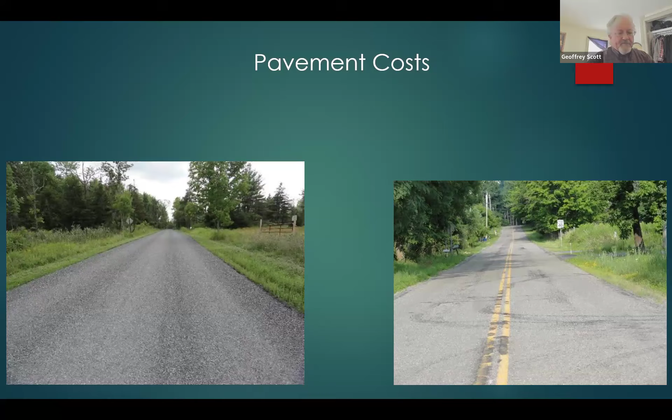So all too often maintenance is deferred on some of these roads, and over time, if you don't do the maintenance - particularly if you don't seal the cracks - moisture gets through those cracks, softens the base, the top surface of the pavement flexes, and it just shatters, causing potholes and loss of sections. So typically, once you start losing your road base, the repairs become astronomically expensive.

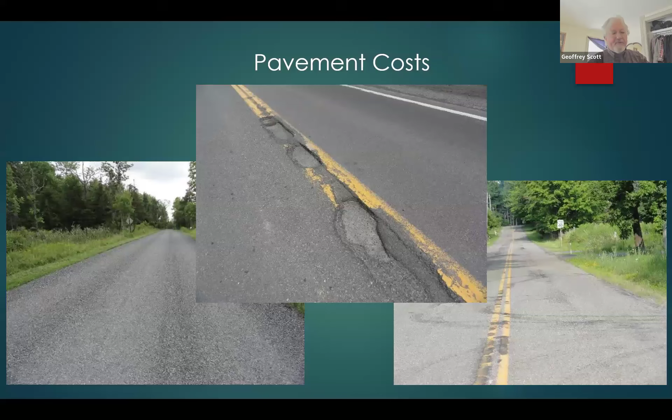So again, just being able to look at what you're doing, fixing repairs properly. In this center photo right here, they didn't use a tack coat, either that or it was dirty when they put it down. Simple practices that are going to give you the best bang for your buck long term is what you're looking for.

For pavement service life, for 75% of the time on most pavements, you'll see about a 40% drop in the condition. That time is going to vary. It can be 5 years, it could be 10 years, it could be 25 years. It really depends on how well that road has been designed and developed, and the changes in traffic, the weights of the traffic. But for the most part, 75% of that time, the pavement is typically in satisfactory condition.

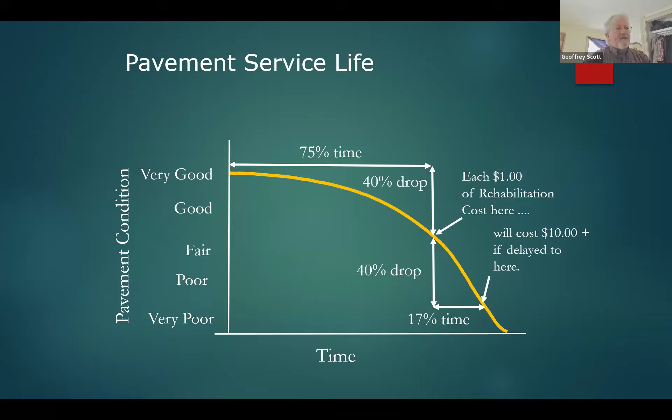But once those cracks start to become a little bit more prominent, you get that moisture in there. Once the moisture gets into that subbase, you're going to start seeing substantial drops in the condition and the life and the strength of that pavement. That's what we're trying to avoid if we can. If we can keep those roads in good shape, we're going to get a lot more bang for the buck and a lot more life out of those roads.

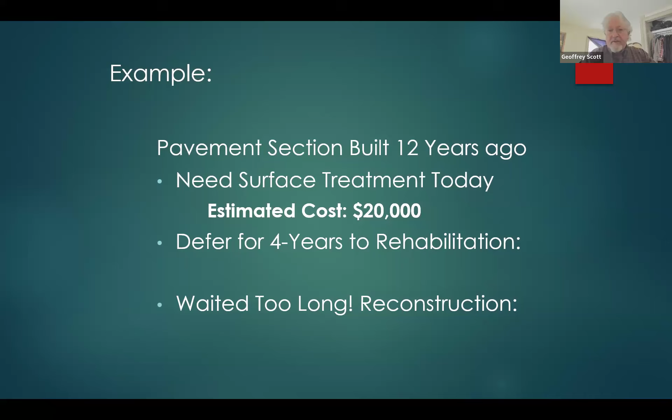For example here, the pavement section was built 12 years ago. Right now it needs a surface treatment, so that surface treatment is going to cost 20 grand, depending on the length and other types of things. But sealing that surface and putting a new surface texture on it, you're going to extend the life of that pavement. If you decide to put it off for a few more years and defer it for 4 years, then you're up to a rehabilitation. So now you've tripled, even quadrupled the value of what it's going to cost to bring that road up to a good condition. That's just putting it off, just deferring it - it's going to cost you long term. And if you wait too long, your estimated cost is going to skyrocket.

Reconstruction is where you'd really like to avoid if you can. The surface treatment, you can get a lot more roads done with just maintaining your roads in good condition. It's like painting your house or something - you're just putting a coat on it and protecting the wood.

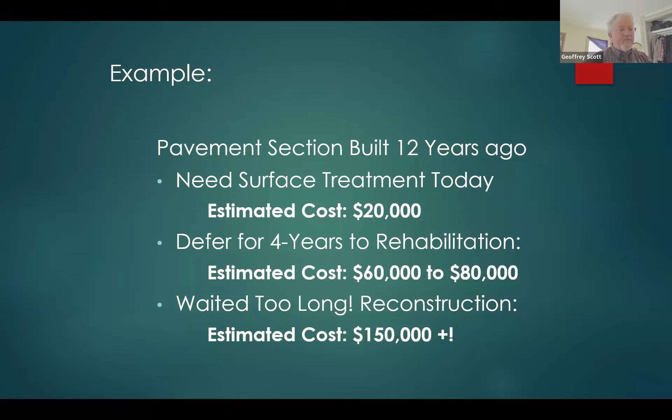Maintenance, or any kind of maintenance when it comes to equipment, is you can pay me now or you pay me later. It doesn't make sense to save pennies now and put off needed maintenance - deferring those repairs is going to cost you a fortune later on. So again, think about what you're doing, be conscious of what's going to happen. Time doesn't wait for anyone, and neither does the maintenance.

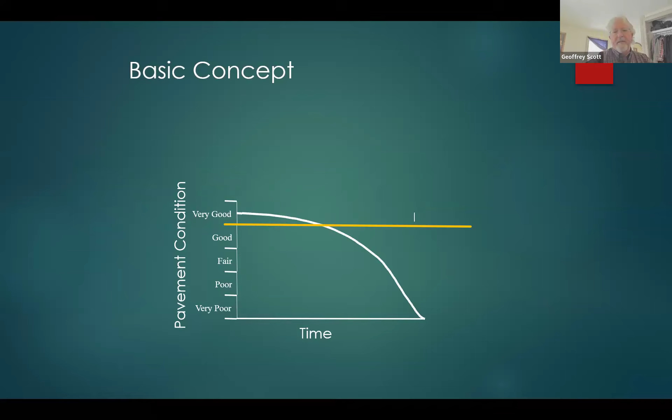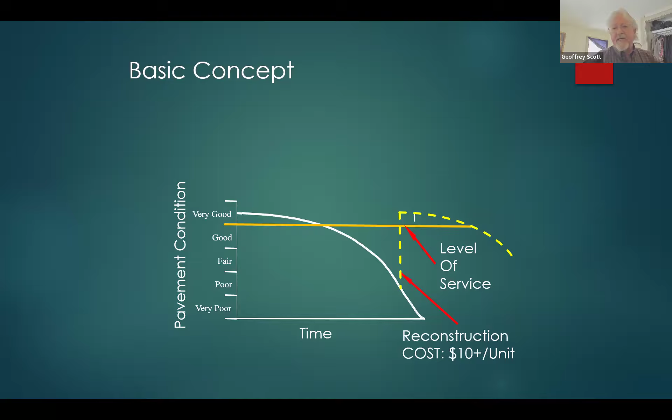The basic concept when it comes to pavement management, or any kind of management system within your network, is you set a condition that you want to try to maintain those roads at - a level of service, is what they refer to it as. Instead of letting those roads go to failure and getting charged $10 per unit, whatever that unit might be, if you can do your regular preventive maintenance over a long period of time, that $1 per unit is going to be a lot more cost effective. The roads are going to be in a lot better shape, and long term you're going to have good roads over the longer period of time. So the idea behind asset management is basically taking care, doing your regular maintenance, keeping those roads or those pieces of equipment in good shape.

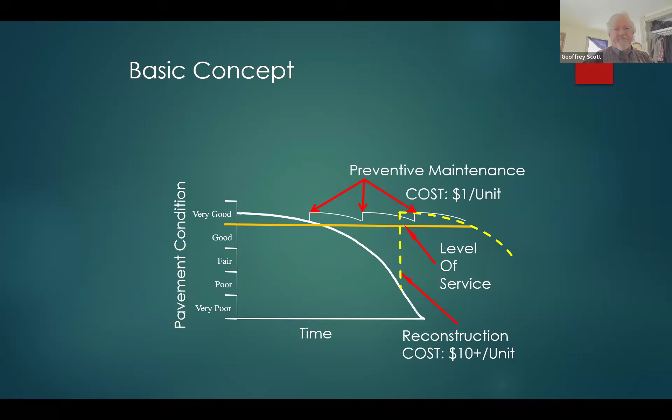There's all kinds of software out there that you can take a look at - you can jump through hoops. The best practice is just basically keep it simple. You want something where you can actually look at apples to apples, not get too deep into the minutia and lose your way. If it gets too complicated, you're going to lose interest and you're just going to go back to doing something basic.

So essentially, you want something that's going to be easy to learn, something you can convey to fellow workers and the town board so they understand what you're doing. It's got to be systematic, with a good and organized approach. So again, it follows steps: this is what we do next, this is where we're going with this.

It needs to be practical. If it doesn't make sense, nobody's going to do it, nobody's going to understand it, and it's going to be hard to explain. And again, that brings it back to understandable and acceptable. If you can get people to understand what you're doing, they're more likely to actually accept it and be on board with helping. And some of the benefits of asset management...

Well, essentially, you're getting an efficient use of your limited resources. We all know the funding we get from the state and our tax dollars—nobody wants their taxes to go up, and the state's in the same boat. They can't necessarily give unlimited funds to everybody, so we need to be a little more conscious about how we spend those limited resources. If we can be efficient, that's a good way to start at the very least.

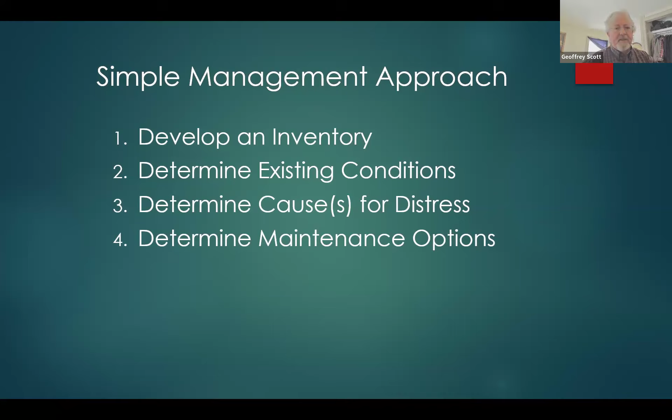Again, determining what your maintenance options are—there's a ton of different things you could do. And what's wrong with the road is basically what you want to correct. So you're going to evaluate what the causes are and try to fix those problems using the proper maintenance options. A road that's broken up with a poor base—if you put asphalt over it, you're just covering the problem up. You're not going to fix it. That road will fall apart in a few years.

And then for each of these maintenance options, you want to put together a unit cost. That way you can compare apples to apples. If you've got three roads that need certain types of repairs done, you can see what it's going to cost you by square footage, a unit cost. So again, developing unit costs for each of these maintenance options is going to help you develop a plan a little bit more effectively.

And with all this information, you develop that plan—you know which roads need to be done, which roads are more important, which ones are critical for the community, and what condition they're in. So again, working on what's important and focusing on what needs to be done, you can develop a plan.

Once you've got that plan, you can interactively select which ones and start scheduling these projects. Most likely, you're going to have a lot of roads that need critical maintenance, so you'll have to decide which ones need to be done in a prioritization method, basically which ones go first.

We do have a Cornell Asset Management Program, a software we've developed called CAMP. It's available to anybody, and it'll help you do this. It's possible to develop spreadsheets and do it all on paper by hand, but we do have this simple software available to all. Once you purchase it, all our upgrades and changes are free, we don't charge you to get those upgrades. Again, just another option that's out there, something we provide.

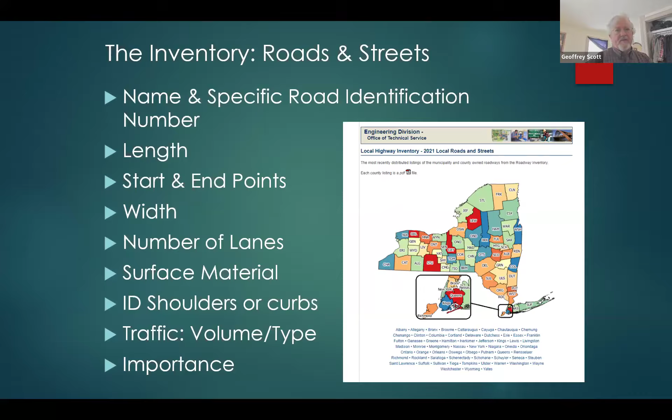So looking at them a bit more differently—New York State puts together the local road listings. You probably need a magnifying glass to look at this, but you can blow it up and take a look. Every town has it, identified by town. It goes through all the different roads. You can see here, the Bailor Road has multiple sections, broken down, telling you where they start, where they end, how many lanes there are, the pavement width—a lot of information that's useful when developing an asset management plan for those roadways.

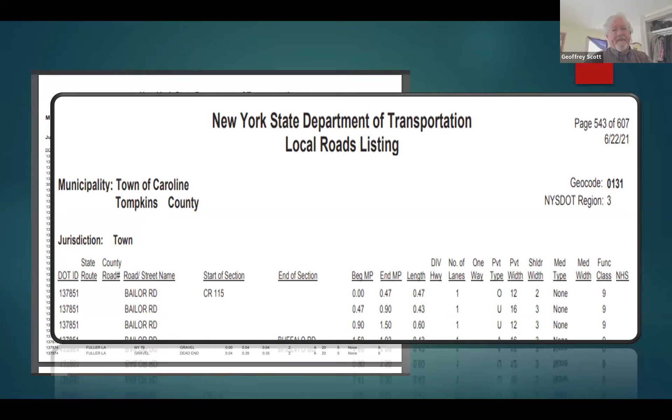Jeff, we have another question that came in: how are bridges classified in asset management? Local entities as well as states do own bridges.

I don't really know what you're talking about as far as classifying. Most bridges are owned either by counties or states in New York State, and some towns own their own bridges. But what do you mean as far as classification?

As soon as that clarification comes in, I can let you know. Yeah, a little more information would help.

Look, again, your condition assessment, when you're looking at these roads, you want to take a look at what those roads are doing and what factors are actually causing these conditions to deteriorate. It could be a variety of different things: the technique of putting the asphalt down, the subbase, the climate, the soil. It could be a ton of things. But individual cracking will identify some of those different conditions that are showing up.

When you're doing your condition assessment, you want to see what that current condition is. How bad are the cracks? How big are they? How frequent are they? Are there potholes? Are there low spots? Try to identify some specific problems - is it poor asphalt? Is it frost? A lot of problems are going to be out there, and if you can identify what the problems are, it's going to help determine what those repairs actually are going to be.

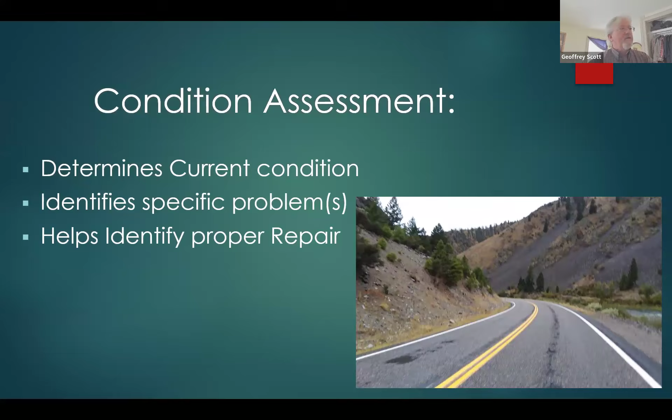Well, if you own bridges, they're definitely an asset. They're an expensive one, so definitely you would want to maintain that. I do believe the state goes through and evaluates bridges on a pretty regular basis, and will flag them if they're in poor condition. But again, planning ahead - if you own those bridges, you're going to need to plan ahead to do some sort of maintenance with them.

What was the question - did I even get to the response for that? I just dismissed it. So of course I don't know exactly what it was, but what I can do is send them our email if they want a further in-depth answer. Yeah, definitely, we can help them out if they have more in-depth questions. All right, thanks Jeff. All right.

So again, as far as assessment resources, how do you look at your roadways? The federal highway actually puts out a distress identification manual, which is pretty useful. They used to put out paper ones, but now it's digital. It's actually part of the handout - there's a link there for that. It goes through and discusses what the causes are, some of the repairs, what you're looking for, and helps you identify how to fix those distresses.

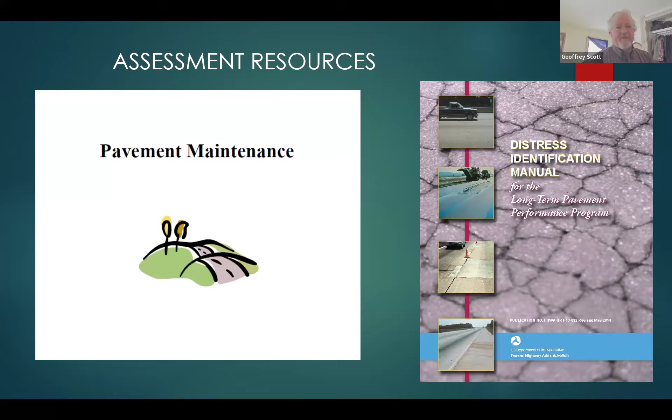Again, developing repair costs is going to be one of those important steps you're going to need to do, and they're going to change on a regular basis. You don't want to get carried away - you don't have to change them every month, though they probably could be updated that often. But you just want to do them for every year and get an idea of what your repairs are going to cost, using those repair costs. It's an important step - it's going to help you determine what repairs you want to do and where that available funding is going to be spent. You want to focus on the general overall repair.

Once you get into a project level, you're going to start looking at the details. You're going to find a lot more. There's always something, but again, you'd look at the overall general repair. Again, you want to keep it simple.

It's going to try to develop a plan, try to focus on which roads are more critical for you. And then, of course, with those costs, as I mentioned a little while ago, you're going to have to update them annually because those costs will change. Cost of asphalt is all over the place, and where you are in the state is all over the place as well. So one of those critical things is updating costs annually - labor costs, vehicle maintenance costs, all that stuff's going to be rolled into it.

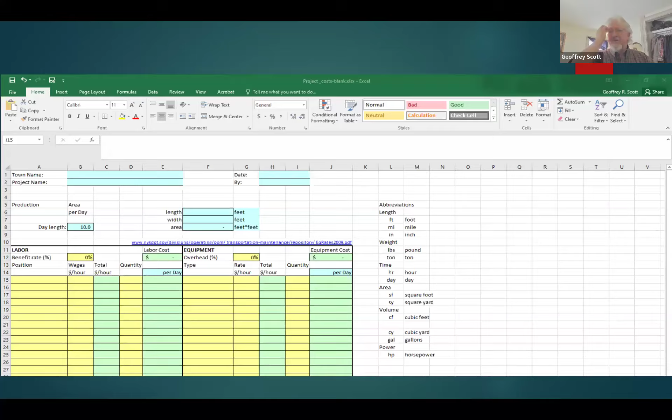Another picture, a little hard to see, but as far as how do you develop some of these project costs, David's developed a spreadsheet that basically helps you go through it. It'll help you itemize your labor - you can put down names, wages per hour. It'll calculate quantity and how much it's going to cost per day, and tally up what it's going to cost per day in a 10-hour day. Equipment as well - if you've got to lease equipment or put any kind of charge in for your equipment, you could put that in there because there's going to be a cost to that piece of equipment, whether you own it or not. You're still putting wear and tear on it.

If there's any invoices - if you're renting equipment, renting a backhoe, whatever it might be - you can put them in there and it'll tally it all up and give you results on this final page. It'll give you a summary of the cost, the invoices, the labor, give you a total expected cost, project materials. Again, it's a pretty versatile worksheet. David has developed that as well, and that's available if anybody's curious, just to play around with it.

In developing the plan, when it comes to roads, you want to base it on what the needs of the roads are. Covering up stuff just doesn't fix the roads. You want to use a simple prioritization method if you can, and focus on keeping good roads good. Again, you're going to get the best bang for your buck if you can keep those roads in good shape over a long period of time. Keep them in good shape, then you won't have to fix them as often, and as you're using them, they're going to be in better condition.

What you want to do is try to extend the life. It's like changing oil in your vehicles - it keeps them going longer. So doing minor maintenance is going to be a lot more cost effective. Sealing the roads or putting a thin overlay on one of your roads - you're going to seal it, you're going to keep the moisture out of it, you're going to extend the life of those roads and the condition. So the idea is to try to extend the life of what you've already made investments in.

Then it comes to prioritization. There's always going to be some need to prioritize. Again, it doesn't necessarily use cost comparisons - if you start putting costs into there, money will chase you off for sure. But basically, you can do comparisons based on needs, community needs, or the needs of the facility or the roads might be. Again, it doesn't include a simple process that accounts for the future deterioration that's going to happen - that's the nature of asphalt and any kind of equipment.

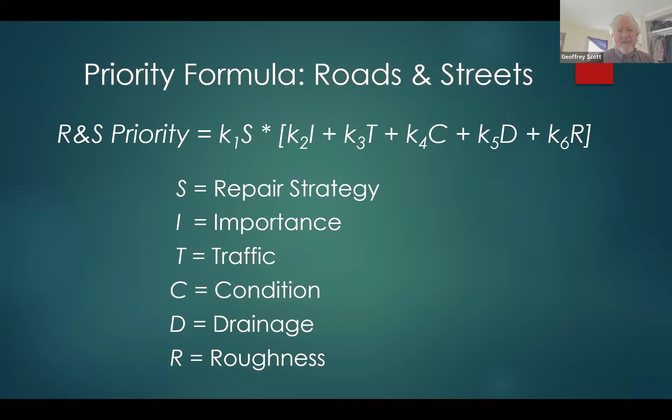You've got S, the repair strategy - what level of repair is it going to need. I is the importance of that road. T is traffic, the type and volume of traffic. Then the condition - what's the condition of that road. And then, of course, drainage and roughness. Those are all going to impact how well the road is, how well it's going to last, and how its use is actually going to be.

When it comes to repair strategies, again, what you want to do is preventive maintenance - you want to keep those roads in good shape. Routine maintenance, you want to cut the brush back, make sure your signs are visible. A tree growing over a sign before a stop or an intersection is going to cause a large lawsuit. Cutting that brush back is going to save you a lot of money long term, and possibly lives.

Corrective maintenance - if you've got a road where there's just basically one little pothole showing up, but overall the road is in good shape, maybe just take the effort and properly correct that one section of road to make sure that road is in good shape overall.

And then there's, of course, deferred work. It can be done on good roads, but it also can be done on really, really poor roads you can't afford to fix. Again, putting it off isn't necessarily going to hurt it any more.

Then you get the rehabilitations where you might do the mill and fill or a basic reclamation where you don't get really carried away - you're rehabilitating the surface of the road. Once you get to reconstruction, that's where you've got to redo all the base, the substructure, drainage, infrastructure, all that other stuff. That's where you really get into the large expenses.

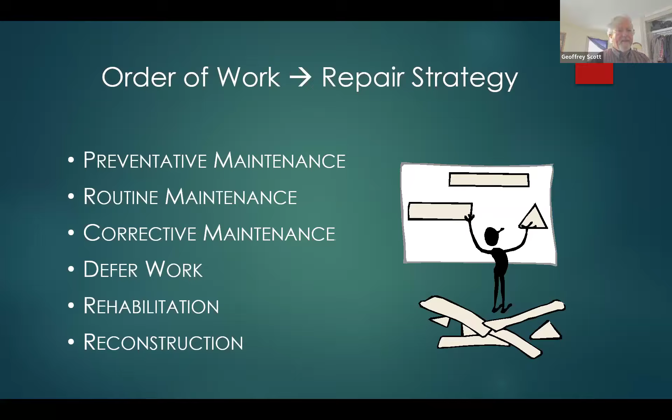So again, if we can keep away from that portion of our maintenance level and do the preventive maintenance, routine maintenance, we're going to get a lot more out of it.

Where that falls on the pavement condition, or the asset condition, you can see routine maintenance is something you can do all the time. Regular maintenance, whether it's good or very good - like changing the oil in a vehicle - is going to make that vehicle last substantially longer. Preventive maintenance, corrective maintenance, again, keeping those roads in good shape, keeping that piece of equipment in good shape, is going to be critical.

And once you get into rehabilitation, the condition starts to draw into rehabilitation or reconstruction, and that's when the conditions basically get substantially less.

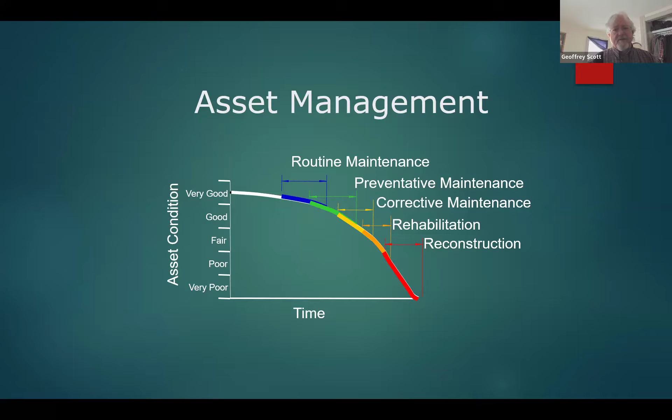And the costs go hand in hand with those levels of maintenance as well. Good and fair roads usually cost 1x the cost of a repair, and once you get to poor or very poor, you can amplify those costs by 10 at a minimum - any more, with the cost of everything going up, maybe even more.

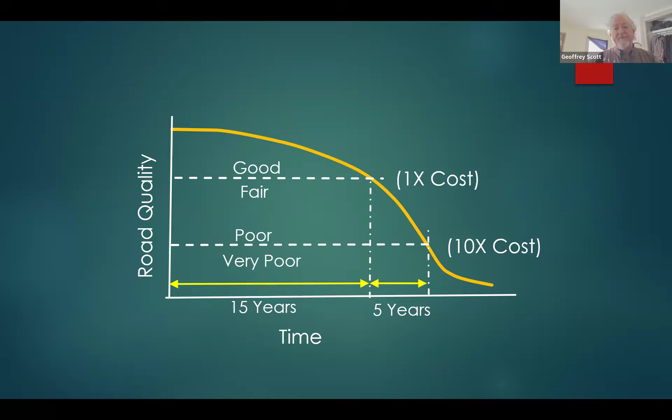Again, what we strive to get people to think about is doing the right treatment at the right place at the right time. Again, let the distress tell you what's happening.

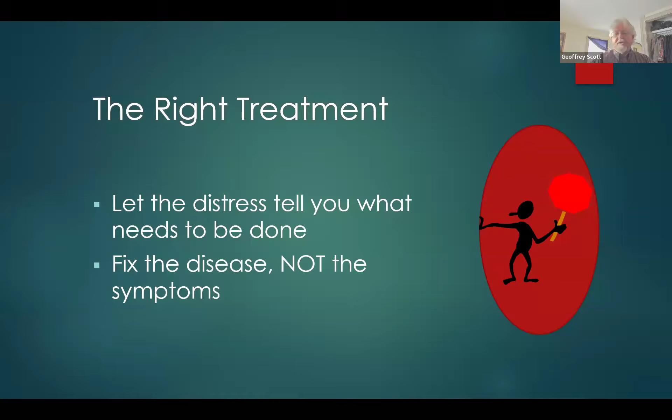If you've got alligator cracking, then you've probably got some sort of weakness in your subbase - it's causing that pavement to move, causing that surface to crack. Different types of distresses will tell you what the problem could be. You want to fix the disease, not just cover it up and give it a new surface, because that will come back - you're not really saving anything, you're just covering it.

Other assets that we have - again, roads are probably the largest investment most agencies have, but hand in hand with them are the culverts. Knowing what your culverts are, what the conditions of those culverts are - they're not necessarily the cheapest asset out there, but again, another critical asset. If a culvert goes out, or a bridge goes out, you're going to have delays, you're going to have problems.

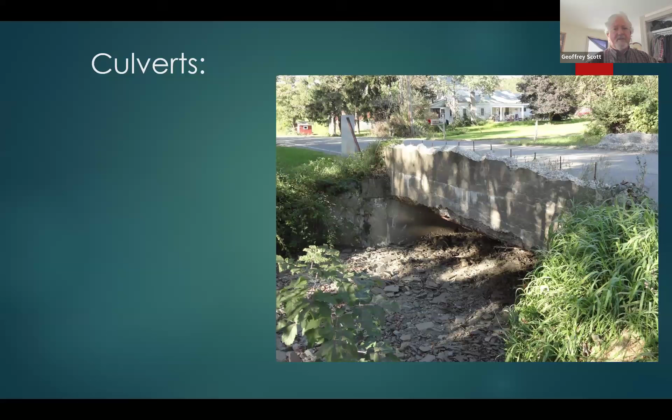So as far as a culvert inventory, in our CAMS software I mentioned earlier with our pavement management, we have added a culvert section to it. So essentially, you can keep your culvert inventory as well. As part of that, it's going to identify what the road is.

Each culvert's going to have a specific ID. There's going to be a location for it. If it's out of perpendicular to the road, again, that's to help identify what that culvert is going to be.

Depth of cover could have a lot to do with how often you want to change that culvert, or if you want to change it at all. If you've got a culvert that's 10, 11, 12 feet deep, that's a large cut - that's a major project. But if it's only 12, 18 inches deep, that's a little bit different.

That's something that can be done in a day. Again, number of pipes for each of those crossings, what is the length of those pipes - it's going to help determine what the replacement would be. As far as those pipes go, what are the widths? Maybe their height. Not all pipes are round, so the width of the opening and the height of the opening may be different.

Again, that's going to go hand in hand with shape and then the material. A lot of metal pipes in New York State tend to, once the coating gets knocked off of them, rust. So knowing what the material is, just be aware there may be a time it's going to have to be replaced, and then having an install date.

If you had the opportunity, just a simple diagram of how that culvert is laid out underneath that roadway. If you end up with overgrown weeds and you can find one end, you have a pretty good idea where that other end went - it's not directly across the road, but it may be at an angle. So again, different things that are going to be critical to look at.

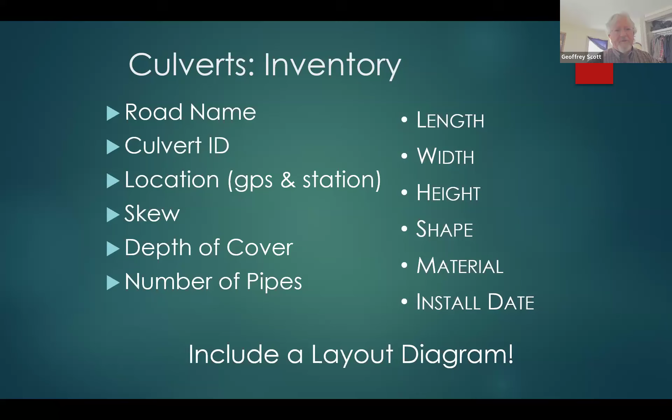In the typical culvert inspection form, we've got these as well. Pretty straightforward - municipality, the date of inspection, weather, where it is, milepost, the inventory, the stream name if there is a stream, shape of the pipe, material, and then any kind of issues that you might have seen while doing those inspections.

And the culvert may not need to be replaced right away, but it may be something that moves higher onto the priority list over time. So again, just having that inventory and those inspections are going to give you long-term knowledge of what really needs to be done in the future. Again, this culvert inspection form is available as well.

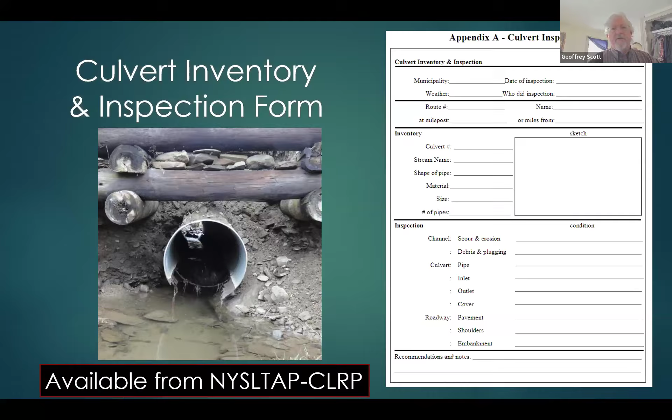Some of the things you might want to look at when you're looking at a culvert: the type of distresses or damages. Again, the shape of it - has the shape changed? Is the cover on the pipe not enough, and the weight of the traffic causing it to deform? Is there scour at the ends?

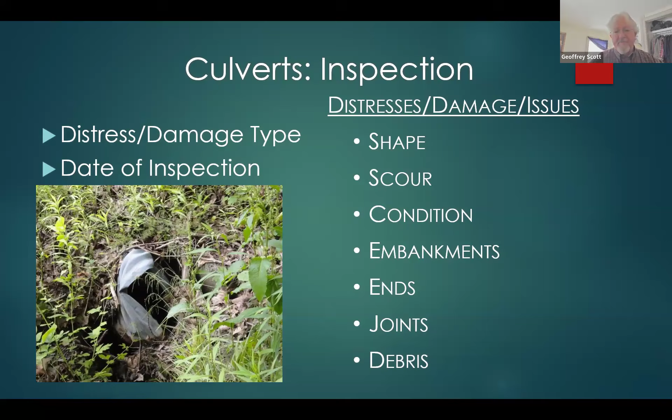What is the condition of the pipe? Is it starting to rust? The embankments, are they eroding? The ends, are they crushed? The joints, are they separating? Is there debris collecting in them? All these things you want to assess because that's going to impact the effective ability - it's going to impact the ability of those culverts to perform.

With our software, we've got a culvert priority formula in there to help determine which ones are which: the repair category, the importance and the traffic related to the road, the condition of the pipe, the type of flow - is it seasonal flow, is it heavy flows, do you get a lot of storms. And then there's another factor as far as aquatic organism passage. This one can be negated if it's not a critical thing, but in some parts of the state aquatic organism passage has become a critical aspect of it, so we've included it.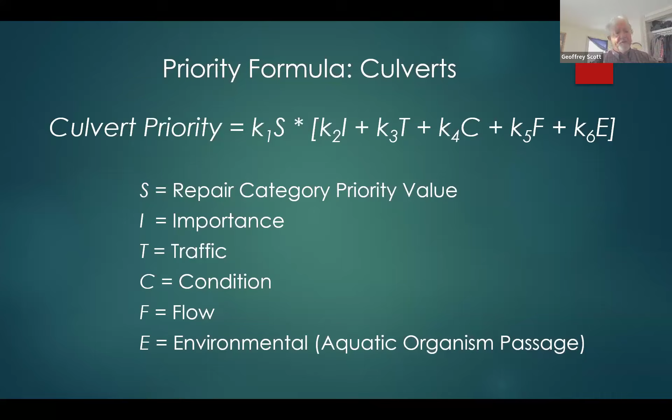It's not standardized. It doesn't have the retroreflectivity. But again, signs are a traffic control device, basically. It informs the user what's coming up. If there's a curve coming up, it might be useful to know that it's coming up. If there's driveways ahead, or any kind of issues that somebody not used to the area isn't familiar with.

Again, identifying where those signs are. It's not unusual to have signs disappear. If you've got certain signs that disappear, that could become a real liability. If you've got yield signs or stop ahead signs that disappear, and someone gets killed, that becomes a real liability for the agency. So if you've got an inspection form that tells you, yes, we saw that last month and it was there, now we're doing our due diligence. We don't know where it went. Yes, we're sorry it happened, but that will help you in the court of law.

So again, just having some sort of sign traffic control inspection, whether the sign, take a look at the signpost and different aspects of each of those.

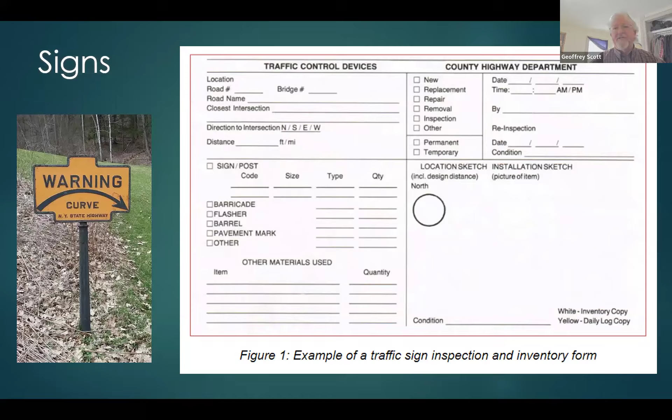As far as the sign inventory, pretty much straightforward with all of them. Where the road, municipal ID, what type of sign is it. Whether it's a street sign, a warning sign, or just an informational sign. What type it is, give it an MUTCD ID, maybe a brief description, size and dimensions. This stuff will help you if you've got to replace that sign and it's not there. You'll have this information there. You'll know it's supposed to be there.

Again, the different materials that are out there, that's going to tell you how long some of these signs are going to last. Locations, the side of the road, where is it facing? A northern facing sign is going to last substantially longer than a southern facing sign just because the sun affects them. And of course, an installation date.

Then the supplemental signs as well. You want to be able to look at those secondary signs on those posts. Each one has an MUTCD ID, maybe a municipal ID. You want the size and the dimensions and all the same aspects that you've had. So if you have to replace them, you know what's there.

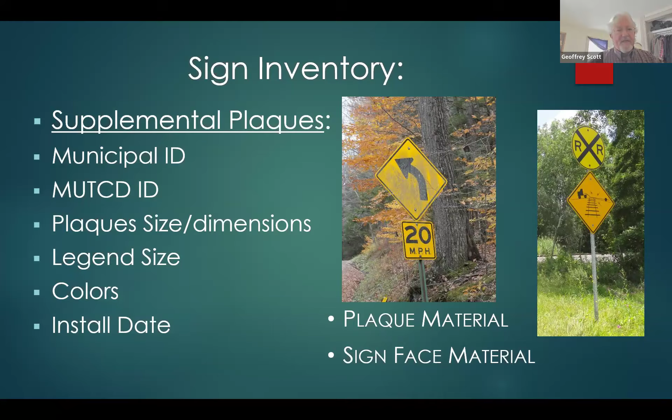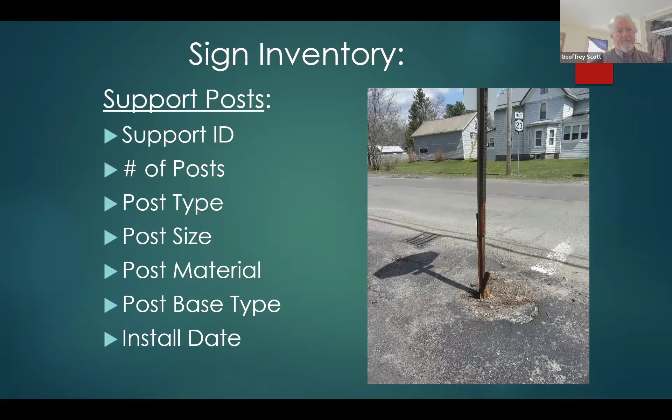Again, signposts as well. It's got some sort of sign ID, post ID, a number of posts. Windy areas, you're going to have multiple posts because they don't necessarily hold up as well. A single post will blow down. The post type, maybe the size, the material, the base type. Again, the installation date - all this stuff should be in the inventory, so it's there. A lot of this stuff will help you if you end up in some sort of legal situation. And all that information is going to support you.

And then there's inspection techniques that are out there as well. There's multiple different practices you can do. You can go out and do daytime visibility, identifying signs that are questionable, and then go back and check them more in depth. At night in particular is when they need to be seen.

You can go out there with a retro reflector, reflective gun thing, and put it right on the sign. You can get retro reflective readings. You can test the legend, background, assess the sign condition, the support posts. Then the sign may be full of bullet holes or it may be worn out. The post might have been hit by a car and somebody drove off, so it may be twisted and facing the wrong direction. Doing these inspections is going to keep those in proper condition and protect you as far as liability goes.

You can do calibration signs, which you basically clip to. Comparison sign procedures, there's consistent parameters procedures. You can go out there and directly measure that sign's retroreflectivity. You could purchase a retroreflectometer, for probably upwards of $15,000. Not many people have them. Then again, it's time consuming. So doing a visual inspection on them is going to be your first step. If it looks like it's not in good condition, then maybe go back and check it at night.

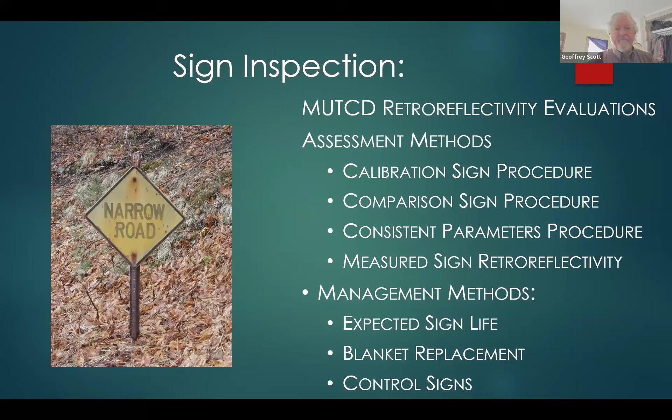There's prioritization too. You want the key warning signs that are critical. If those signs aren't there, somebody can, God forbid, get killed. The stop signs, yield signs, yield ahead signs, intersection warning signs, pedestrians, bicyclists, school crossings, do not pass - all of these signs are critical. If you don't see them and you go in front of those vehicles or hit somebody, it's going to cause a major problem. So the priority signs, the key signs, are usually focused on first, and then the other ones can follow through.

There are other warning signs like the tractor sign, or other regulatory signs, street signs, guide signs. They're not as critical, but you're going to want to replace them - you put them up for a reason. So have some sort of inspection and document what you do. Make sure you documented that you saw that sign on August 4th, it was there. If it's not there on August 15th, you know that you did your due diligence, and that's going to help you long term.

Guide rail is another one. You don't necessarily think of this, but it's another aspect of the roadway system. It's not unusual for a lot of these roads to be paved and paved and paved, three inches each time, and next thing you know that pavement is 8, 9 inches higher than the guide rail was when it was put in. It is guide rail in New York.

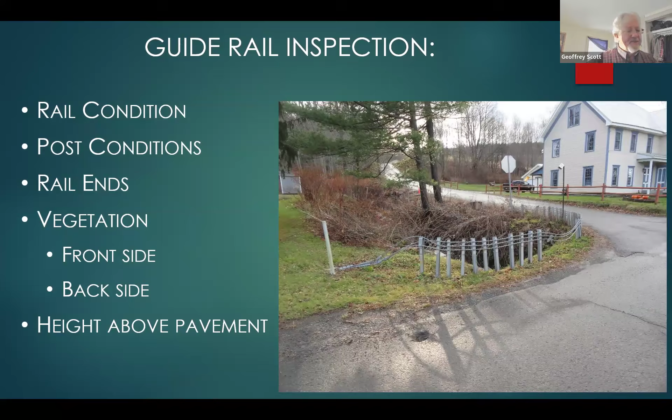So again, just be aware, do inspections on these things. Just be aware of what you have. If you can, or you should, if you're looking at them, document that you looked at them, when you looked at them, what they looked like. Pictures tell a thousand words.

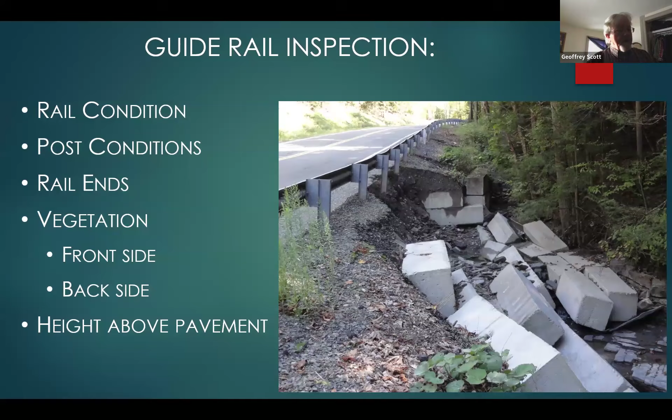All right, how am I doing for time?

Again, the equipment and fleet inventory as well. You want to know what you have, what type they are, document all that. When did you purchase it? What's the replacement cost? What kind of life expectancy? That repair history for each piece of equipment is going to be critical.

There's going to be a point of diminishing returns where repairing that piece of equipment makes no sense. It's time to move on. I know I've had trucks that way - I constantly fix them, I just get tired of it, move on, now I have a new truck. But again, the repair history is going to tell a lot about what you're doing, what kind of investment in that piece of equipment is.

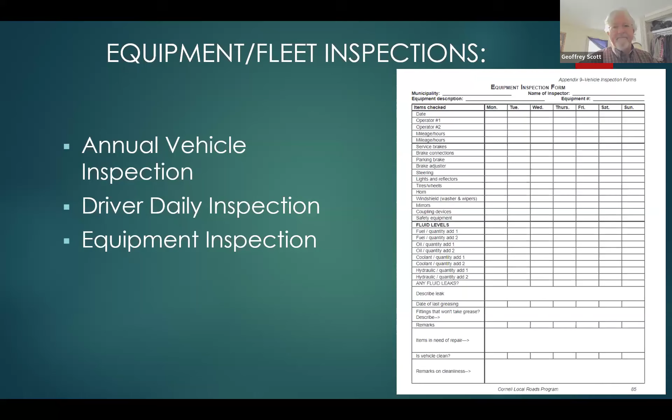So a simple network process, basically, whether it's for your equipment or your roadway, you need to know what you have - you need to have that inventory. Once you have that inventory, you need to know what everything is, what condition they're in. Are they falling apart? Are they in good shape? It's going to give you time, you're going to be able to plan a little bit better.

Develop your maintenance and your rehabilitation alternatives - which ones do you do, which ones are most cost effective in your area? Then just start assigning them, assign those repairs, the alternatives to get the best results from those repairs. Then you prioritize that maintenance, and then once that's complete, you can generate reports, you can develop budgets, and then you want to update any kind of improvements you've made. So basically, those improvements don't necessarily come back.

Again, implementation - it's going to help if you can implement any kind of asset management plan, whether it's with the roads or your equipment, whatever it is. You're going to be able to communicate better with the board. They're going to have a better understanding, they're going to realize that you're looking at what you're dealing with. It's going to be easier to discuss your issues with the board.

Scheduling work is going to help, keeping that maintenance schedule up, whether it's a building or a piece of equipment or even roadways. Scheduling that work, trying to prevent that from getting in worse condition. Again, needing to update - once you've done that work, update your scheduling, keep those other ones coming forward that need that work.